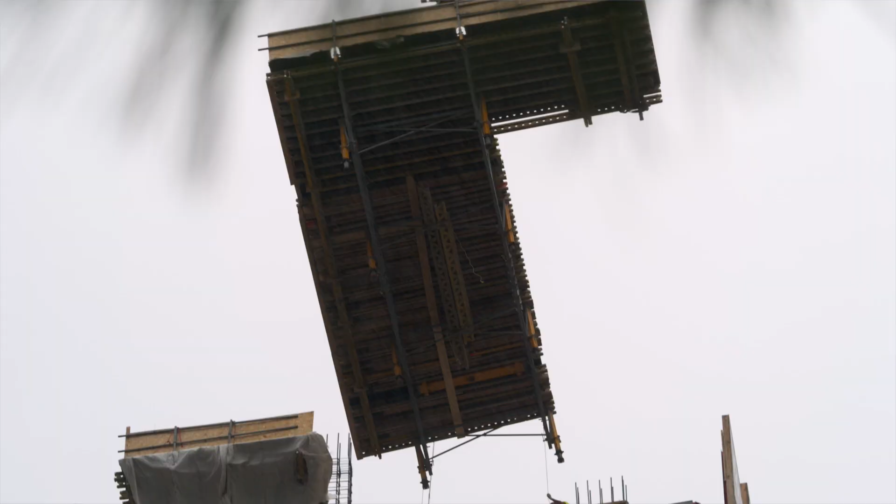The practice of moving fly forms from one level up to the next is high risk. There have unfortunately been multiple incidents. In some of those incidents, there have been fatalities. Simply put, when things go wrong with fly tables, they can go very, very wrong.

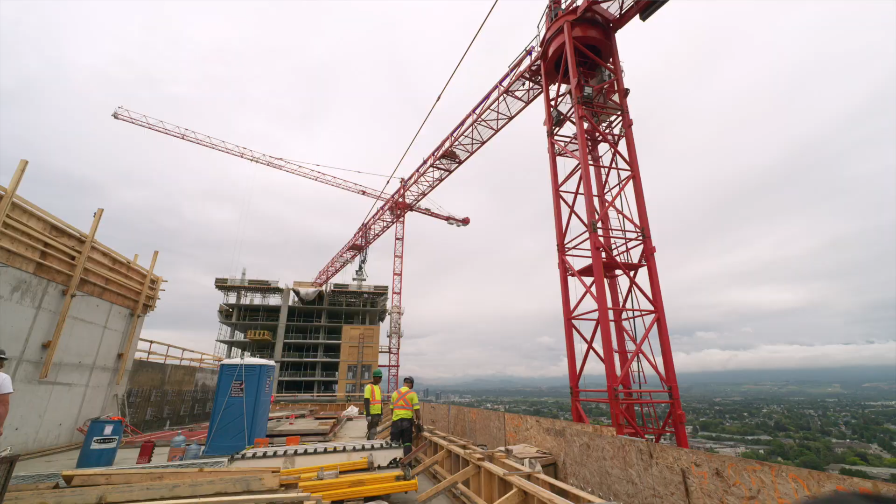Fly tables is one of the higher hazard procedures that we do on site. A lot goes into it in terms of the procedure and controls to prevent those hazards. Any crane activity comes with inherent hazards, but cycling fly tables, there's more moving parts and there's more coordination required, which just ups the ante for something to go wrong.

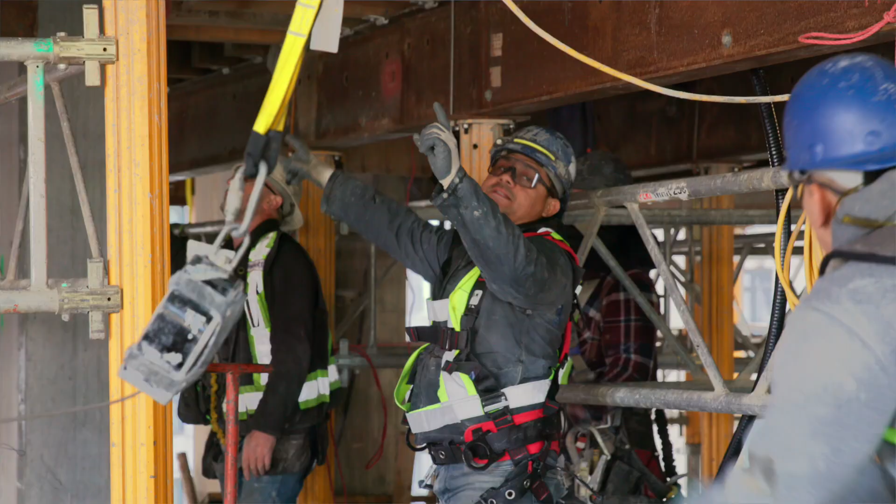We're up high, we're on the edge, we're building these buildings. It's all heavy-duty construction, so there's a lot of working pieces, a lot of moving parts. Everyone has to be on point, focused, and paying attention to their task at hand.

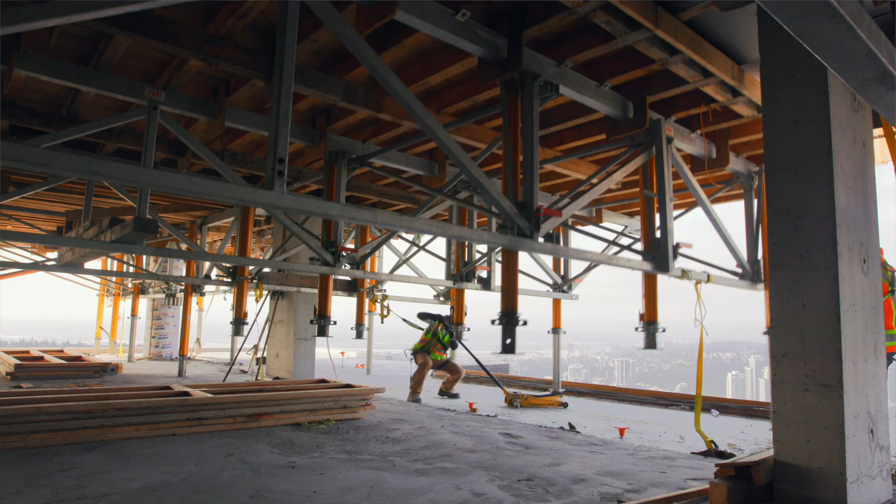These are large, complex operations, and people are at very high risk of getting hurt. As a result, WorkSafe BC is trying to do everything we can to put everybody involved in a position to do this work safely.

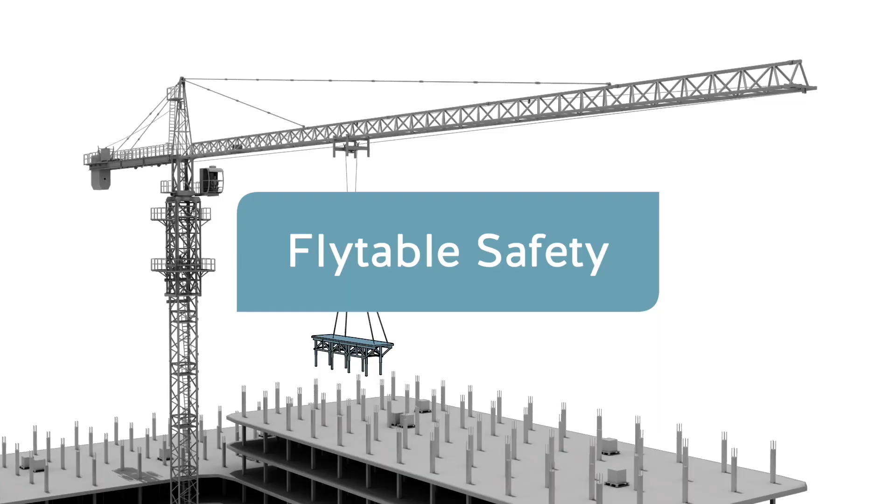The fly table process can kind of be broken down into 4 phases. The first phase is the dropping phase. In this phase, the table is lowered from the hardened slab. The next phase is the rolling phase. In this phase, there are wheels or casters that are attached to the fly table, and then it is moved partially out the side of the building, far enough that the crane can completely attach to the table itself.

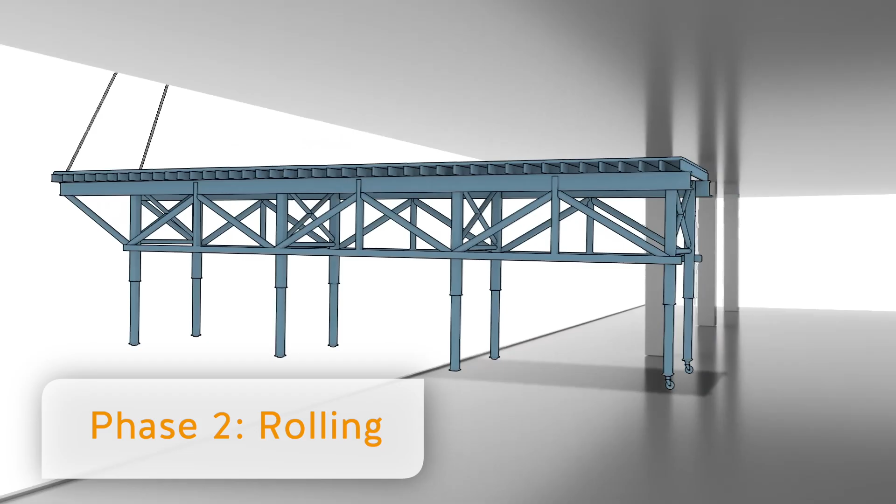Phase 3 is the lifting or the flying phase, where the crane picks the table up, takes it out the side of the building, and then flies it up to the next level. And then the 4th phase is the landing of the table, and it is secured to the point where it can be disconnected from the crane.

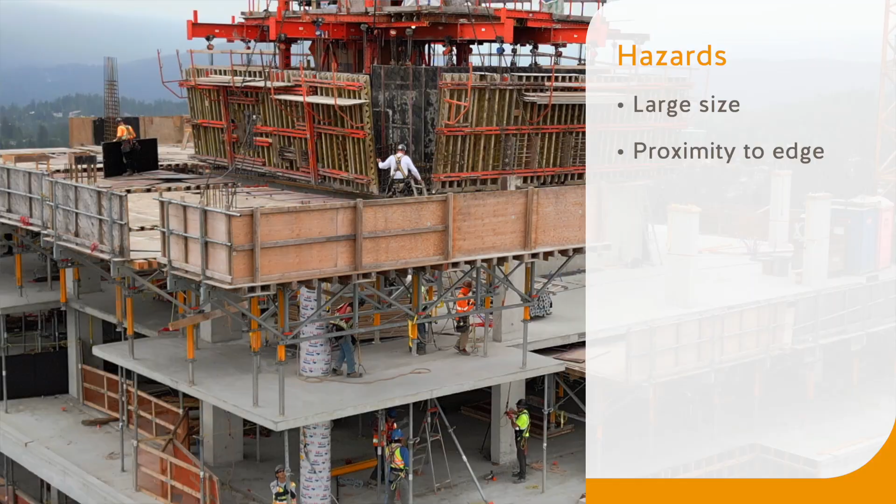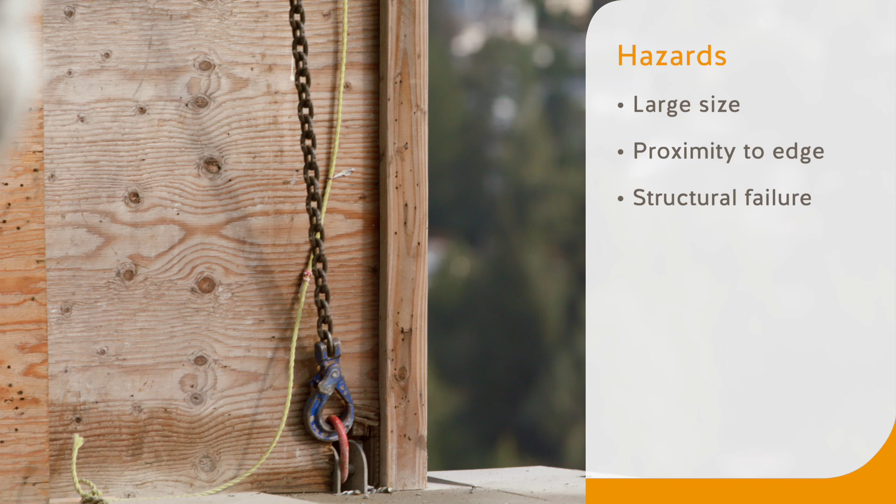Fly tables are large, heavy, so the hazards associated with them are simply their size and their position, also the proximity that they are to the edge of the building, so they can come out of the building, fall, and strike a worker at that point. Another potential issue is structural failure. While the table is being cycled, if one of the components' strength is exceeded, then that component could fail and then the table could fall down onto a worker.

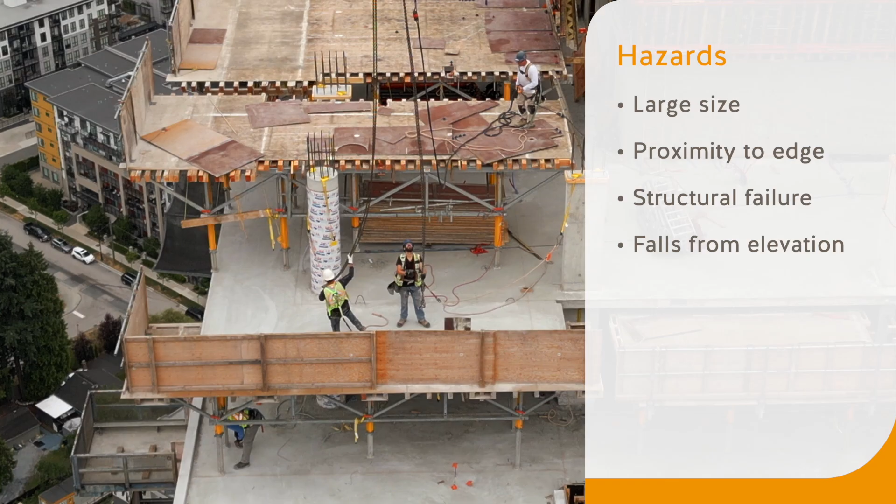Fly table work is done at height, so falls from elevation are another hazard that has to be effectively controlled. Everyone must have fall protection training, wear full fall arrest systems when they are near the edge. It's a long list of things to worry about when you're flying tables.

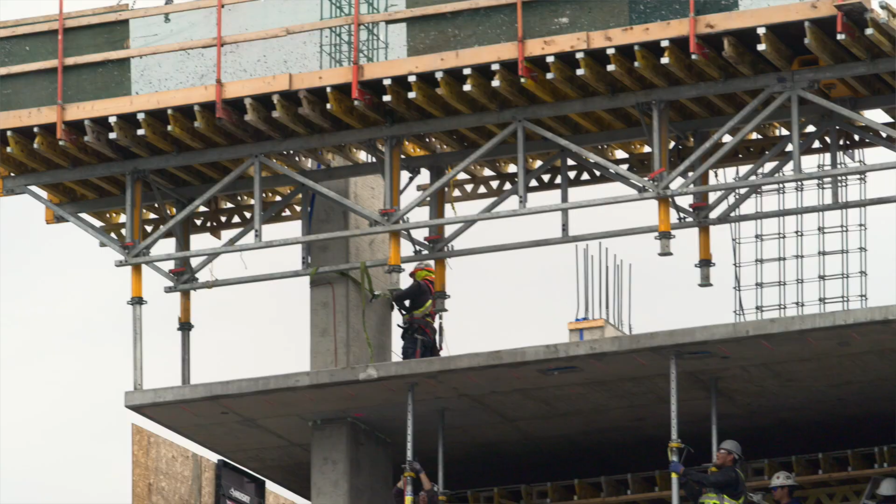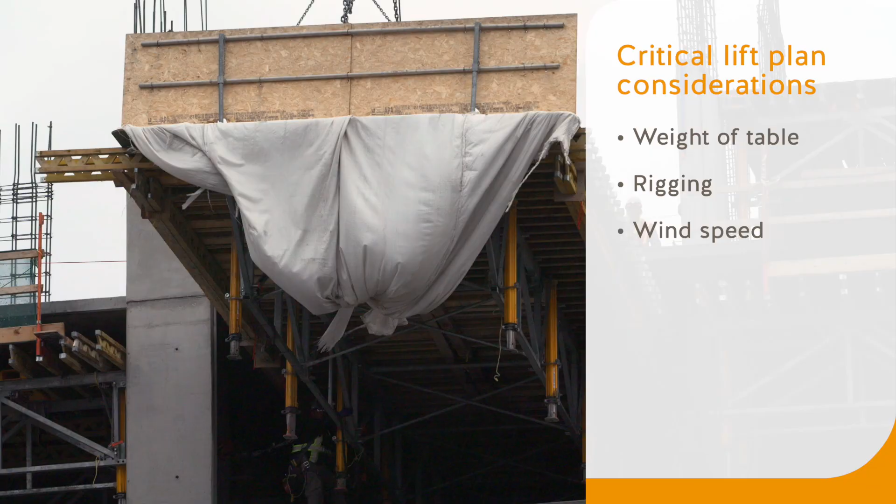The cycling of fly tables meets the definition of a critical lift. So to ensure that that higher risk is adequately controlled, there are these additional requirements. The contractor needs to develop a critical lift plan, which has consideration of the weight that's being lifted, the rigging that's going to be used, wind speed. Windy days, you're not able to fly the tables. Potentially you have the fillers and other material on top of the table that could fly off and come down.

The other requirement is to have a pre-lift meeting before hoisting activities begin on that particular day. All the different lift plans will be reviewed in that meeting, and then the workers, they're clear on what needs to be done. They can go out and cycle the table safely.

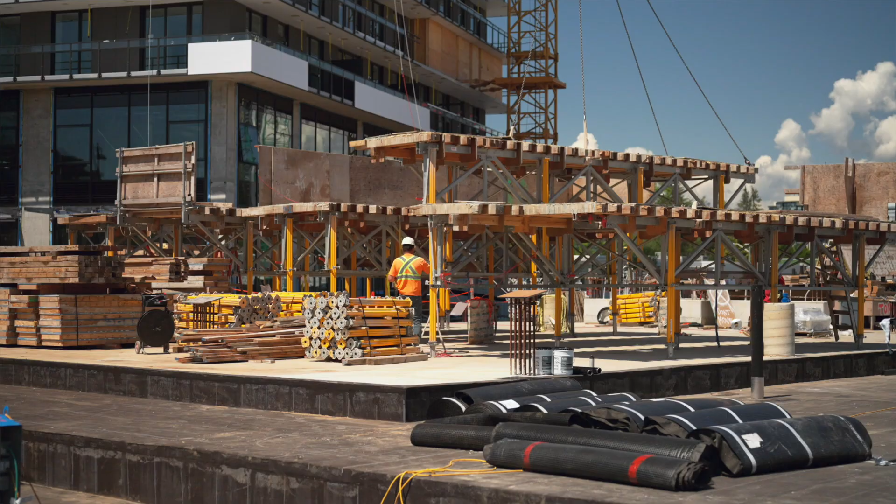The engineered drawings for fly tables are critical. It requires site-specific engineered drawings to be prepared. And so the formwork engineer goes through the process of designing all the individual tables so that the formwork trade can assemble those individual fly tables prior to them being moved up into the building. The drawings also go into details on the cycling process and the crucial steps that need to be followed when the tables are cycled from one level up to the next.

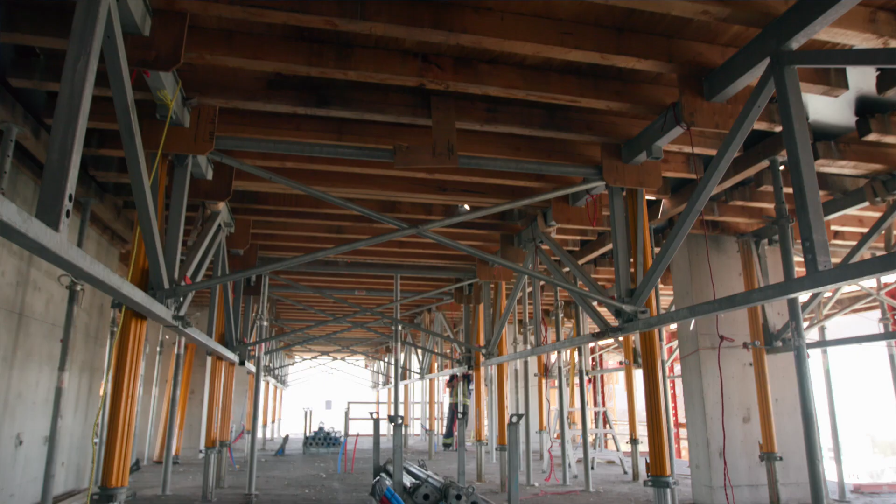Engineer drawings are probably the most important part of the table drawings. We build the tables to the exact specifications of the engineer drawings. Before we pour concrete, a certified engineer comes in and inspects the tables to make sure they are built the proper way as according to the drawings.

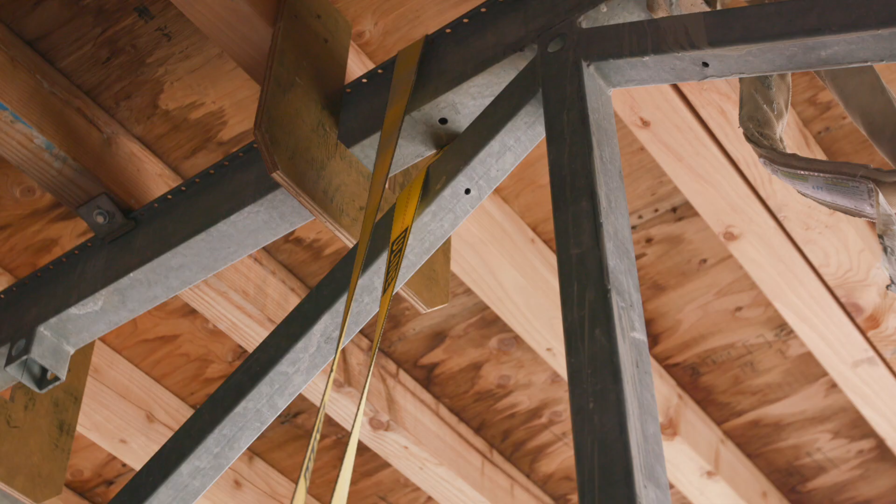Manufacturer's instructions tied in with the engineered drawings are critical because it's their product. They know what their formwork systems can withstand. So it's critical we follow manufacturer's instructions when initially assembling the table, but also in inspecting and maintaining the table so that we are always within manufacturer's specs.

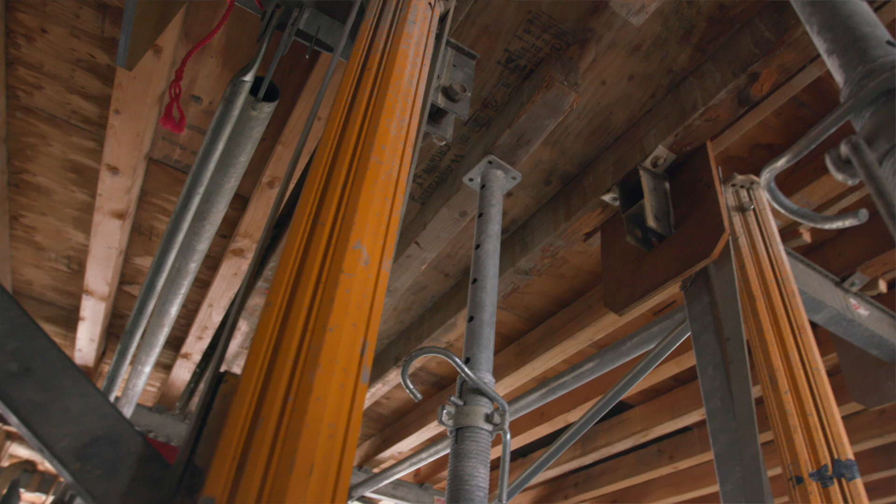The information from the engineered drawings and the manufacturer's instructions, the safe work procedures incorporate that information and then expand upon it and add the additional steps the workers need in order to do that work safely. Safe work procedures deal with the mundane and the extraordinary. That's a chance to identify the risks and how we're going to mitigate those risks.

Before we start our tower, we'll go through a toolbox talk between the whole crew and we'll go through the whole safe work procedure. By having them all together, is when you have the ability to find all the potential hazards and risks and being able to find ways to solve the problem.

Floor by floor, there's always small changes. So make sure that that's addressed with the workers first thing in the morning, so that even workers that are working 4 floors below know it's table day, know what's going to be happening, know what they need to watch out for. It's got to be done as a collaborative process to ensure the safety both for the workers performing the activities, looking after the prime contractors, and the public safety down below.

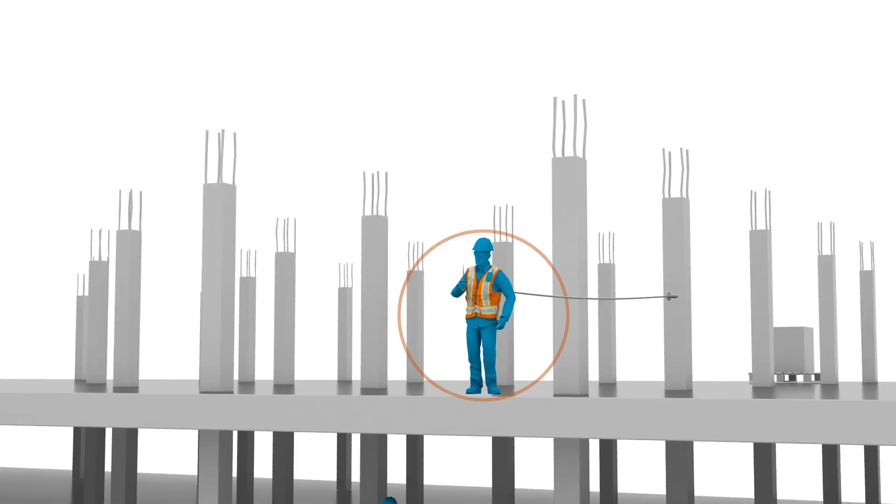On the communication side, you have workers that are on the level where the table starts. There are workers on the level where the table finishes. You have the crane operator. You have the spotters down at grade level or lower levels. They all have to be communicating and working together as a team. It's not just about telling people something or telling them what to do. It's confirming that they've understood and know what to do. That's critical to good communication.

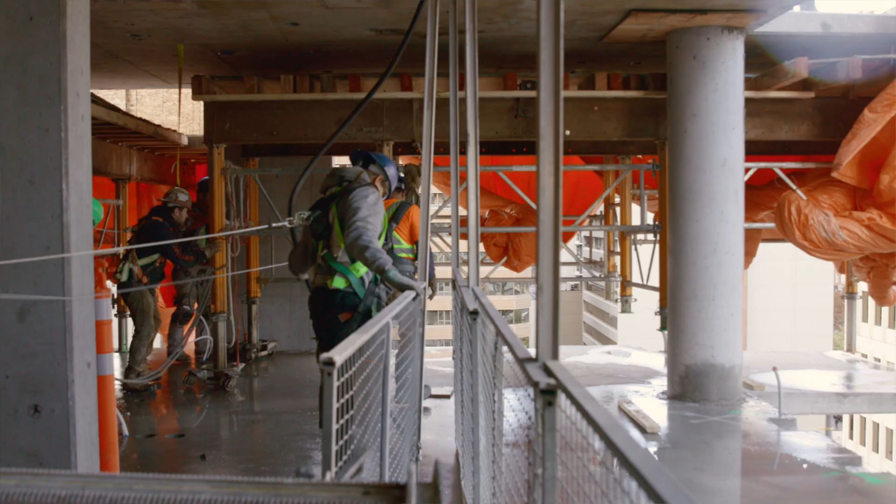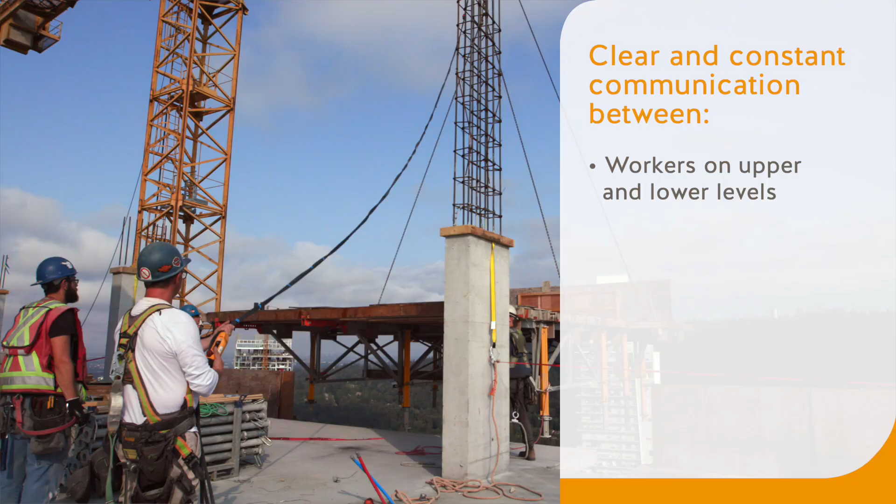As activities happen, the workers working in the same areas are very loud when they're talking because they're constantly communicating about every movement, every piece, every item, so the whole team is on the same page. Radio communication is critical between the crane, the riggers. The bottom rigger, for instance, will let the whole team behind him know what he's planning to do next. And it's the same with the top rigger as the table's coming in. Top rigger has to make sure that everyone knows what's going on and what her next move is.

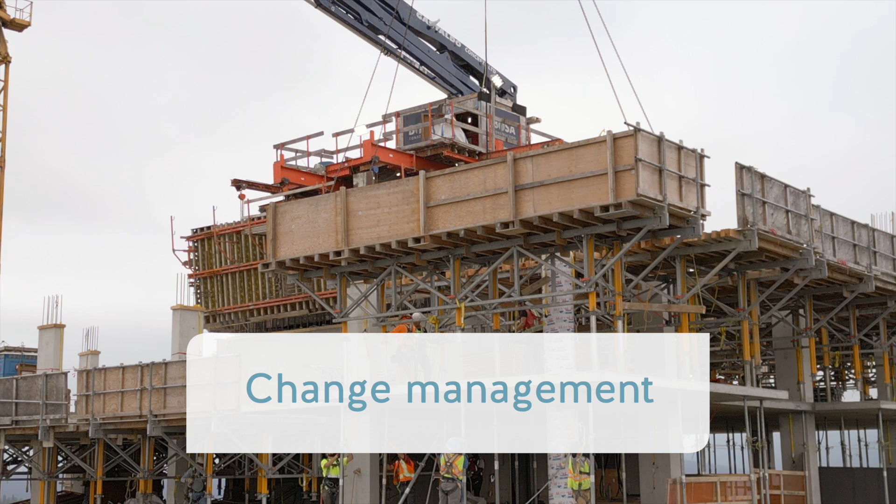The guys are working at heights. We're working with cranes. Multiple crew members are involved in the procedure itself, so communication is key. We often think when it comes to procedures and engineering drawings that this is how it's going to happen on the job site every day, all day. But that's not exactly true. Things happen every day that we have to adapt to conditions as they come about.

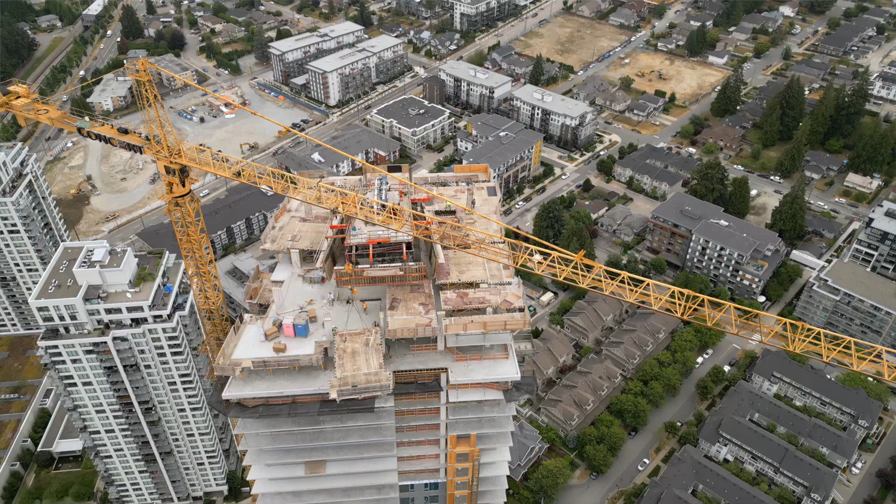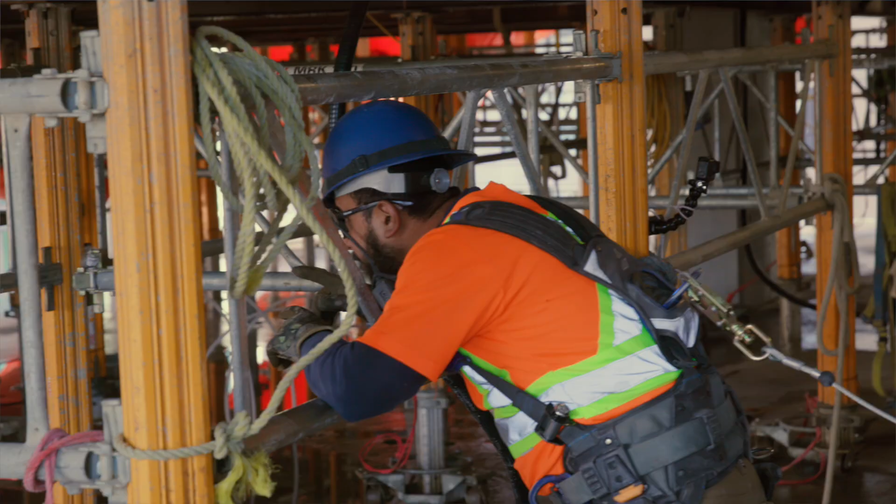A lot of times when we look at incidents involving fly forms, there was a change somewhere along the way, and that helped contribute to that incident occurring. So it's very important when unexpected conditions are encountered, everyone involved takes a step back and really walks through what all the potential consequences are of this change. The first step in change management is stop. Let's talk about it. Let's look at the drawings. Do we need new drawings?

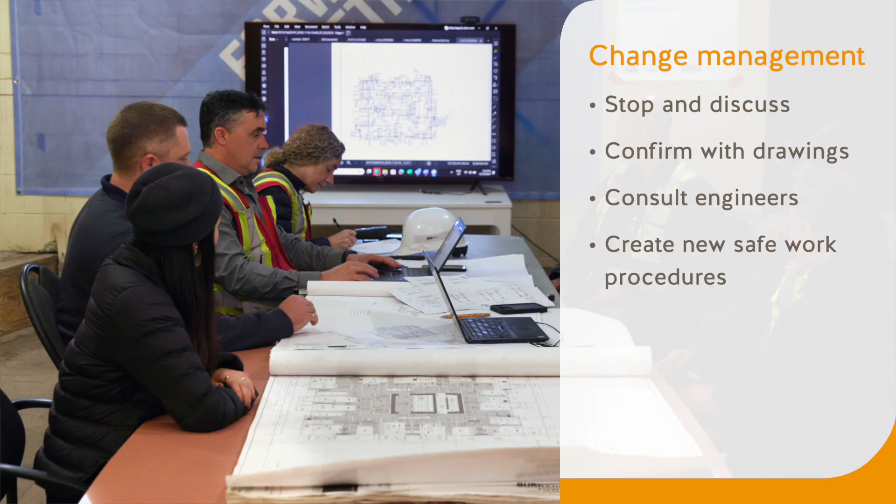When plans are changed, we do get the engineers involved, and then we will create safer procedures based on the engineer's recommendations. Everyone that's involved in that process needs to understand that a change is happening. They need to understand what the change is, and they need to understand what their role is in that change.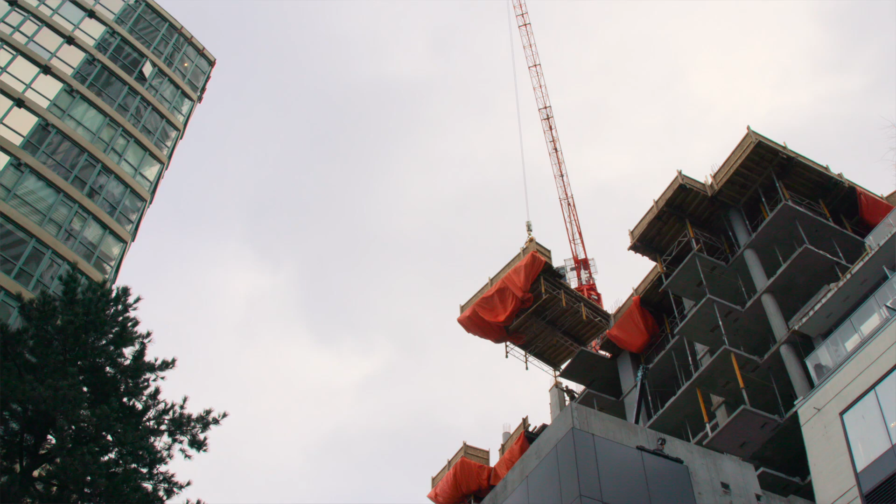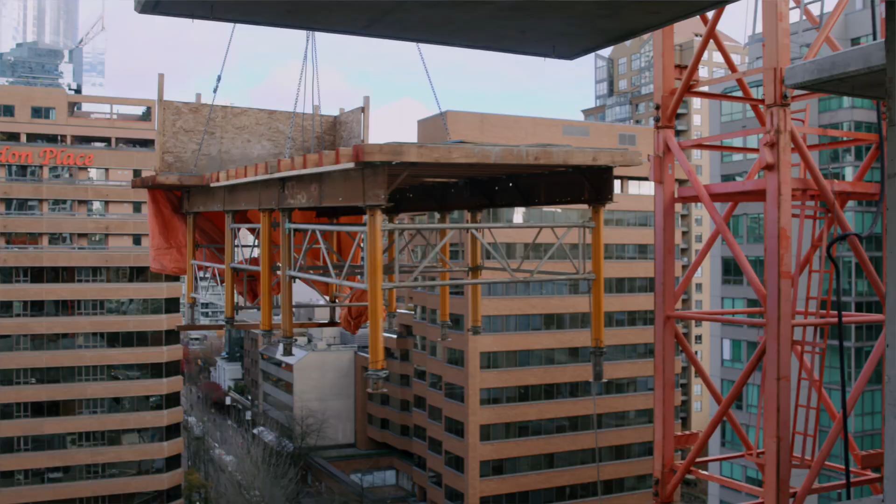The crane operator is ultimately responsible for the lift, and they coordinate the crane activities with the activities of the other members of the crew to make sure that things go smoothly. Just the nature in which the crane operator needs to slew the crane and move the trolley in order to keep the crane hook in the proper position, those are all challenging things to do.

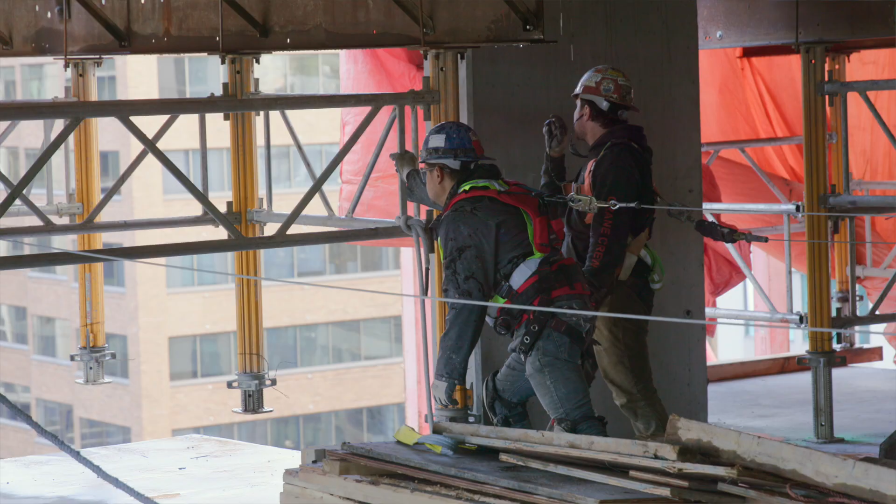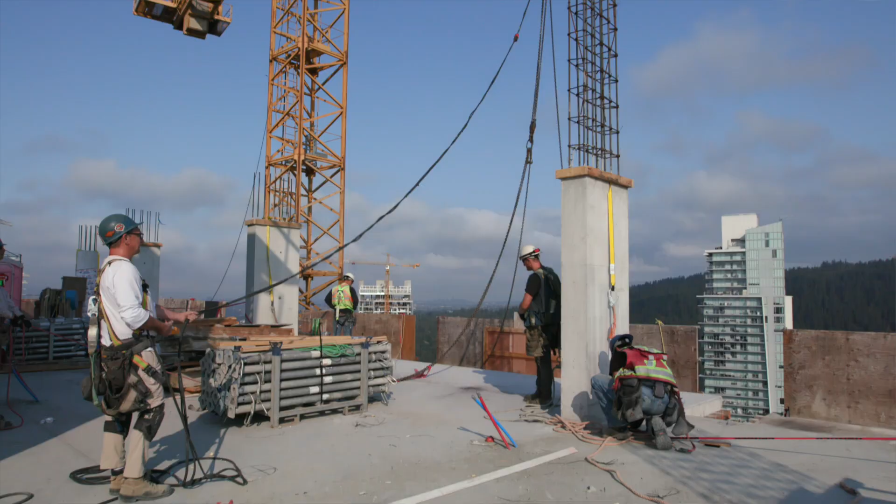The crane operator is really following the instruction from the riggers below. So they're kind of the middleman in all the communication to make sure all the operations go together of what's happening down below, what's happening up above on the slab, and then what actions are actually happening with the crane, as they're ultimately responsible for making corrections to how the hoisting is going and overseeing the overall operation of the lifting.

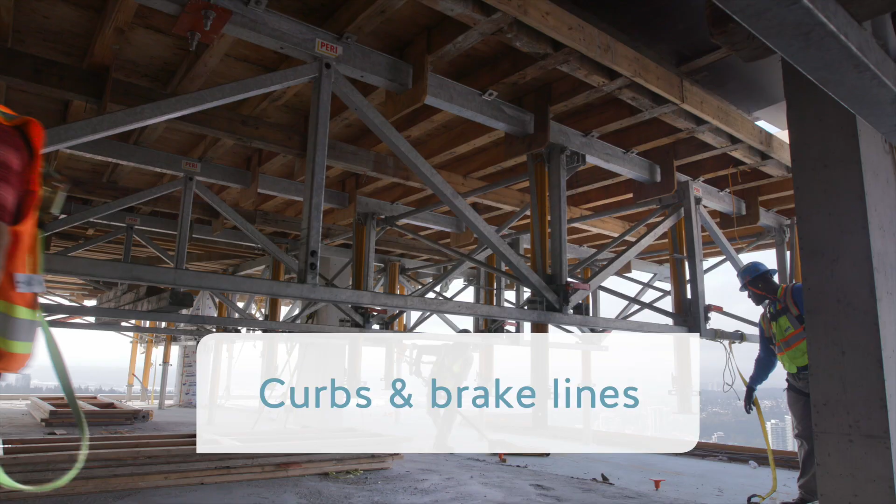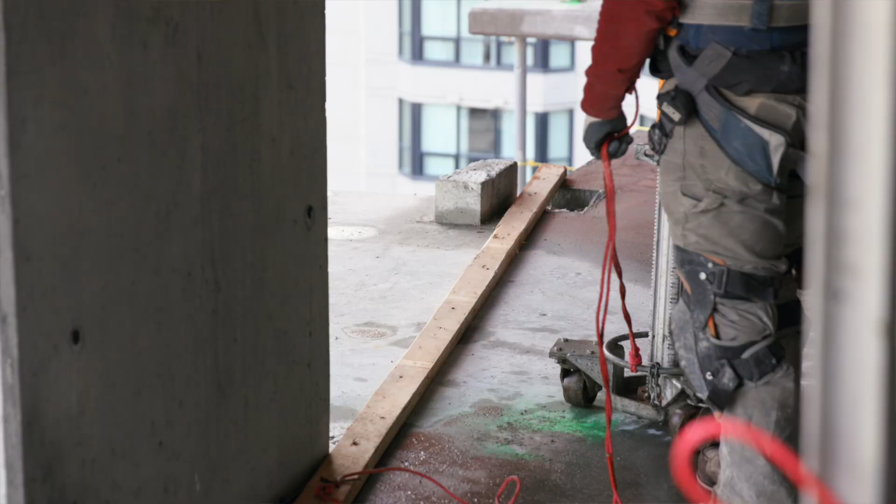In our safe work procedures, the safety measurement of when extra measures are needed on the edge of the slab is whenever the wheels are getting within 300 millimeters of the edge of that slab. So to minimize the risk, we use a kicker block or a curb at the edge of the slab. So in the event that the table is rolling out further than it should, it will hit the curb and stop it from coming off the slab.

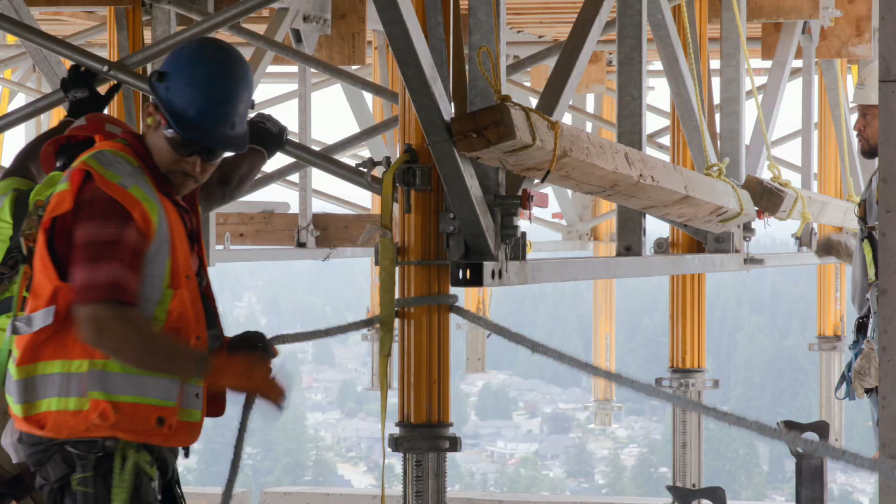We also use what we call a brake line. That's a rope that's tied to the back end of the table, anchored back to a column or a solid structure. And what that does is it controls the momentum of the table rolling out towards the edge so that you cannot build up too much momentum to the point where you can't stop the table. It's all about risk management basics, and it's putting effective controls in place to reduce the risk.

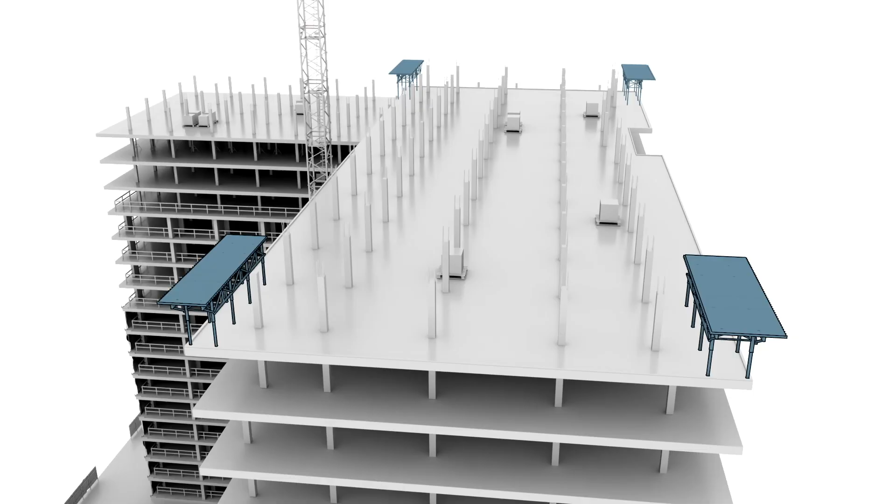The atypical or non-typical tables tend to be the ones that are close to the edges, and they're of unusual shape. They're often awkward to maneuver, so they need to have a plan for that lift, and they need to go over that plan and make sure everyone's aware right before the lift happens.

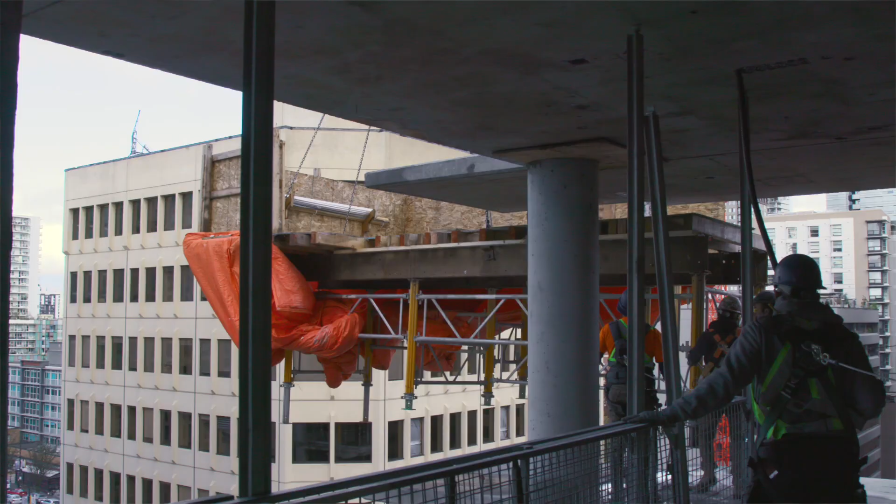The corner tables are a little bit unique just because they're not your typical fly in and out tables. They are sitting on the corner of the building. They're a lot skinnier. Typically, we tie those tables down right away with ratchet straps or coil rods before unhooking it from the crane, just because they are so skinny and so small, we don't want them to tip over.

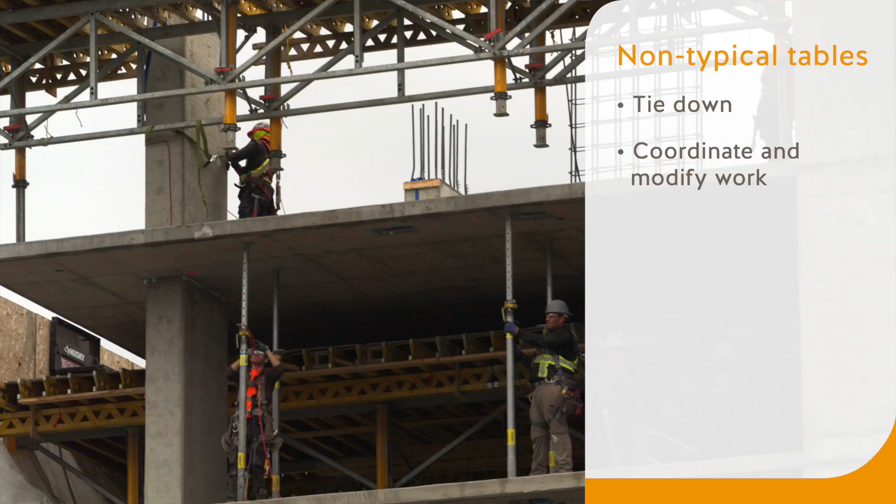When there's a table that's not typical and has to be flown out in a different way, we have to have a coordination meeting, because if a table is being manipulated in a certain way, maybe fall hazards are different, maybe inspections have to be done in a different way. That's up to a general contractor to communicate that to the site.

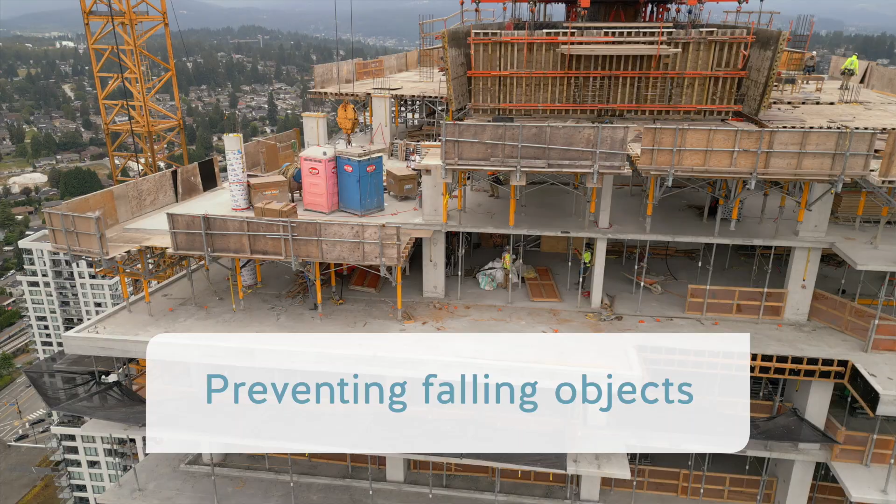For falling object prevention, the intent is nothing falls ever, and that's the goal. So we start by a couple simple principles. Never having materials anywhere near the edges that don't need to be there. Never having tools by the edges that don't need to be there. So you only have things that are needed for the work.

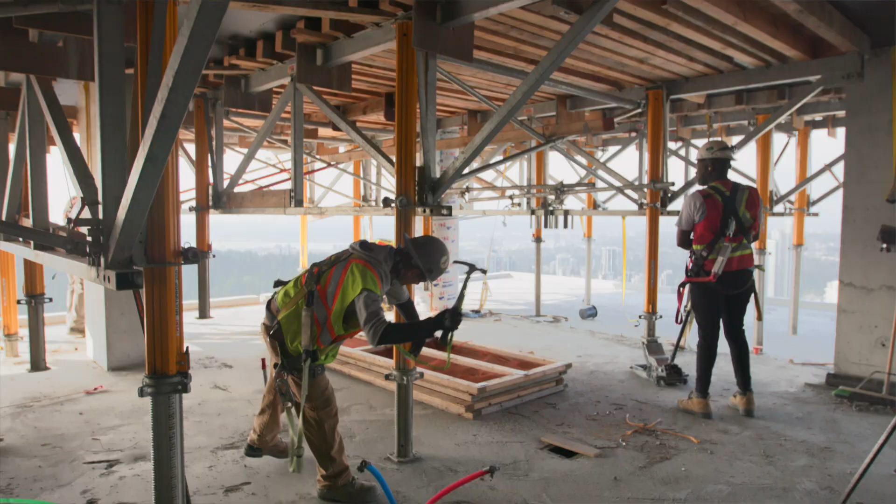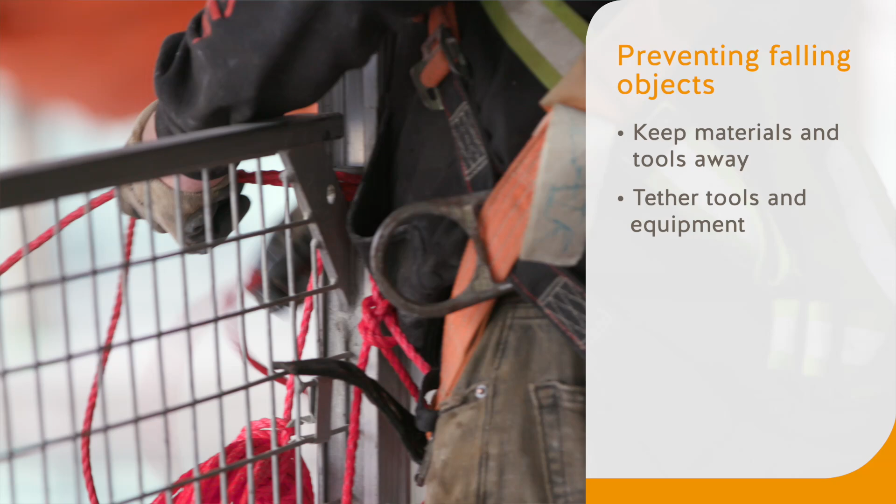Policy on site is that all workers working on the leading edge must tether all their tools and equipment to themselves or back to some sort of structure. And all equipment that's on the leading edge gets tethered back as well. You'll see on some projects there are actually screens at the leading edge that prevent any material or tools from coming off the side of the building.

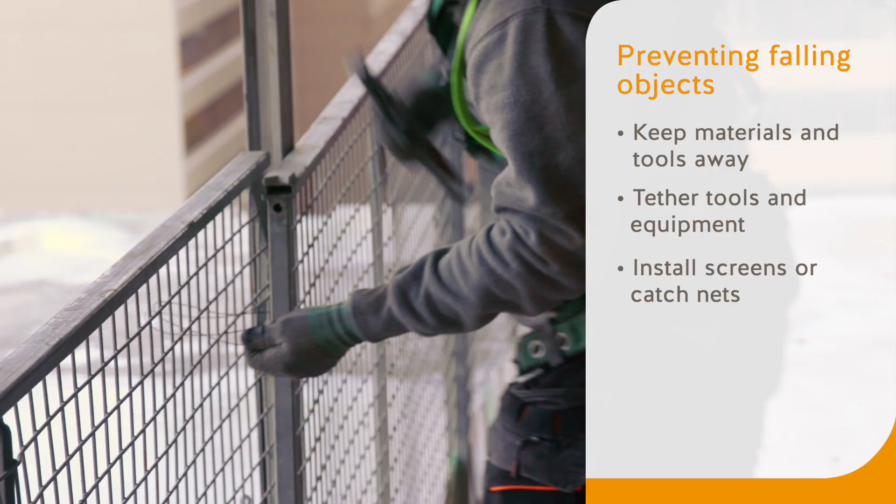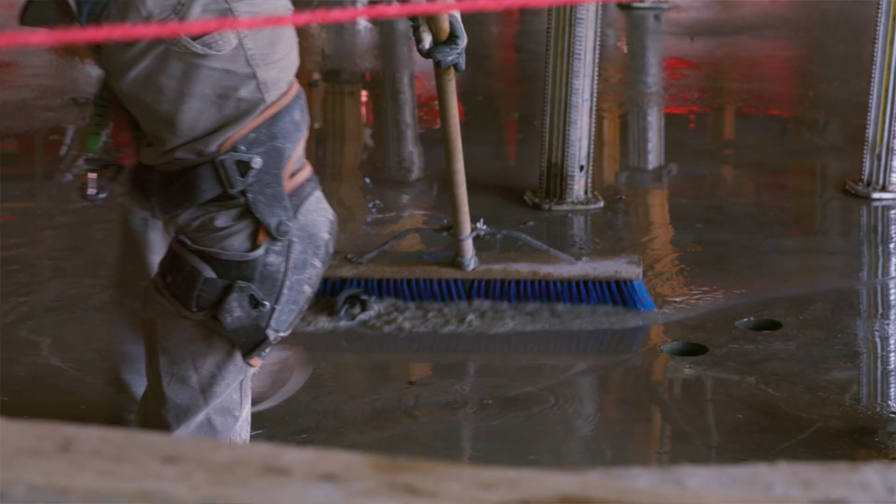And another control that can be implemented is catch nets that extend off the side of the building, so it's going to fall down 2 floors into that catch net as opposed to 37 floors down to the ground. We do clean up around the outside of the tables, any garbage, anything that may come down as we're dropping tables. We also tie all our fillers off with rope that are attached to the tables. If you can get good coordination with these things, you can eliminate a lot of the hazards.

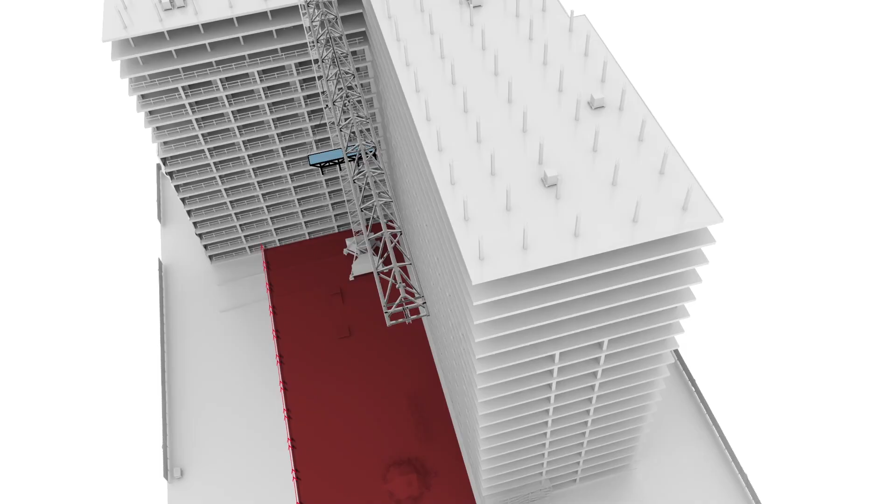There are parts of the regulation that talk about if something is being lifted above workers, that workers need to be kept out of that area where the object can drop. The exclusion zone is specifically an area where nobody can enter it. It is a last resort fail-safe, so that if something falls off the building, it falls in an area that's excluded from all personnel, public. In morning meetings, we discuss where they're located so that we can coordinate trades to work in other areas while those exclusion zones are set up.

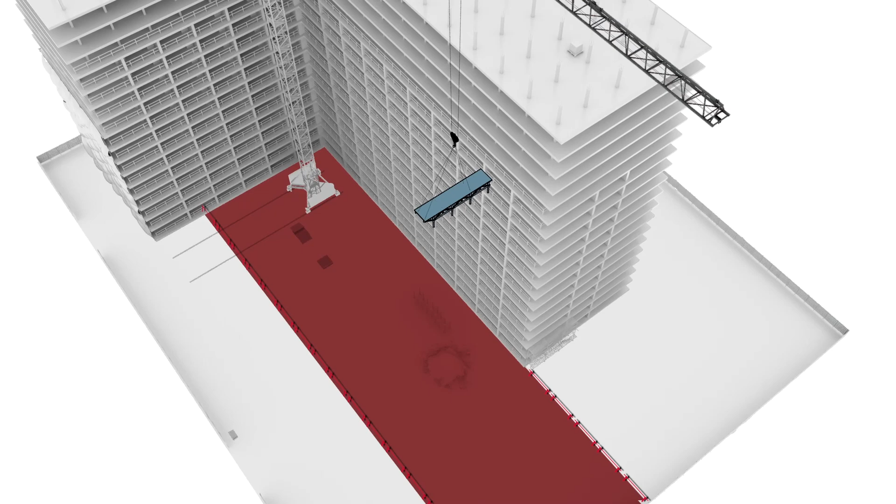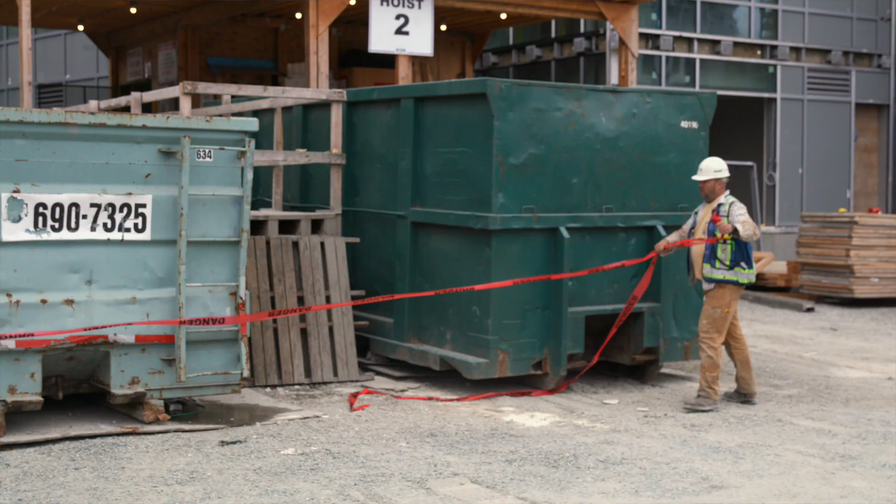So they really need to figure out how large that exclusion zone needs to be. But it also means that there needs to be people down at the bottom making sure workers don't enter that zone. So signage, delineation, spotters, training, supervision, all of those things are critical to make sure that nobody is in that exclusion zone. Exclusion zones move around potentially all 4 sides of the project, and it requires very diligent coordination so everyone knows the timing and the communication of when these zones are being taken down and put up on the different parts of the building.

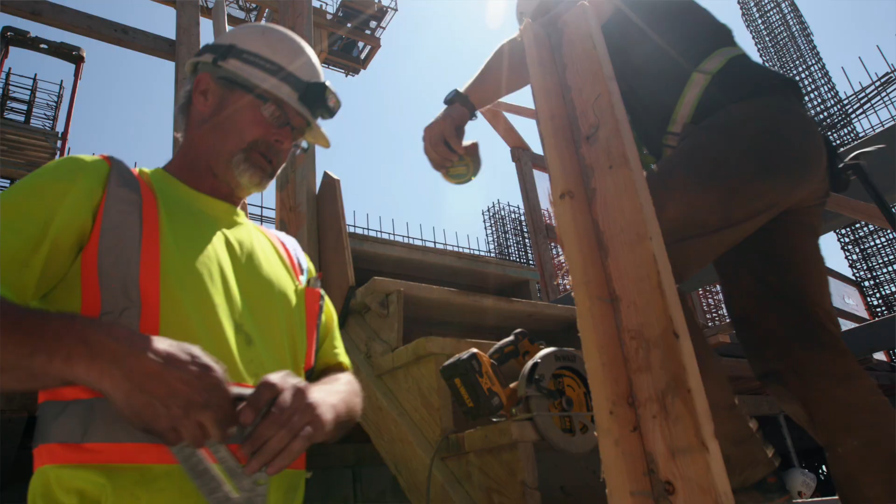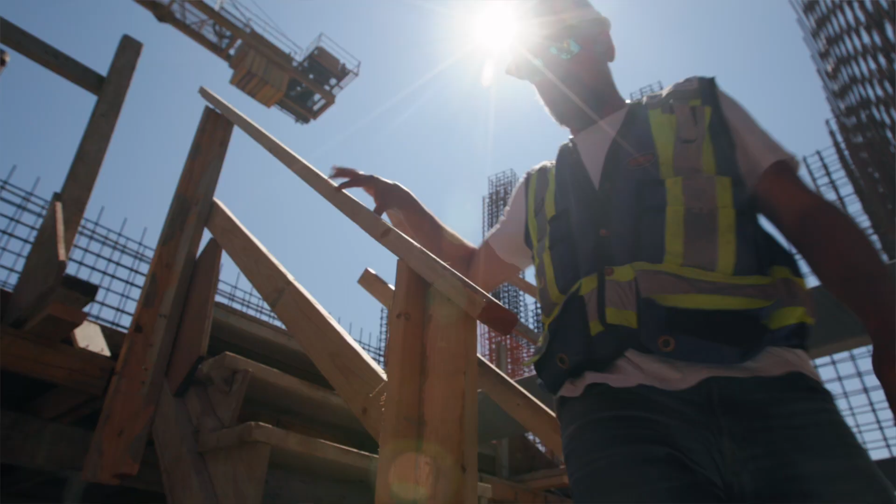Stair access to the next floor is part of our regulation, and it speaks to the ability to easily and safely access the next level when the work is happening. It is much less hazard hauling those items up a set of stairs than it is trying to take them up a ladder. Stairs need to be incorporated in the design. They need to know where they're going to put the stairs, the space for the stairs, and sometimes even have them engineered to be on the side of the fly table when they're flying them from level to level. So it's important to know in the design stage where they're going to put the stairs.

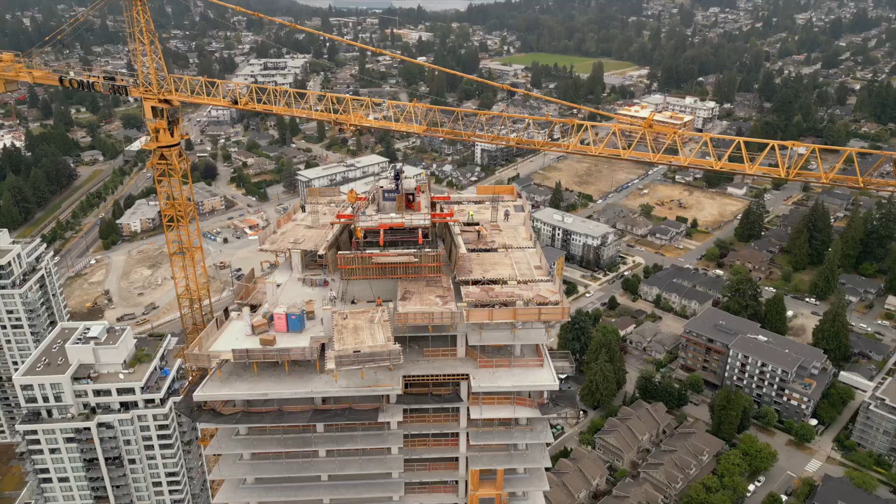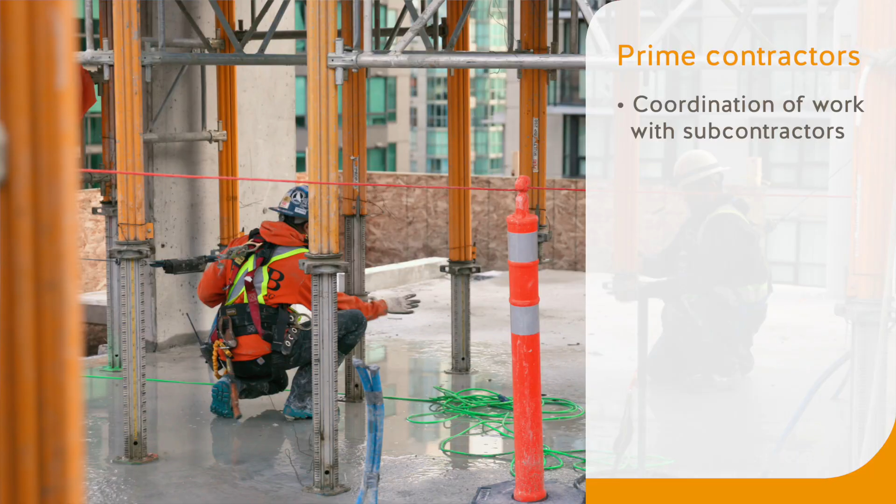Two main functions of the prime contractor, of course, are to ensure that coordination happens, that everyone knows what they need to do and when they're going to do it. The other main function of a prime contractor is to establish and maintain a system that will ensure compliance.

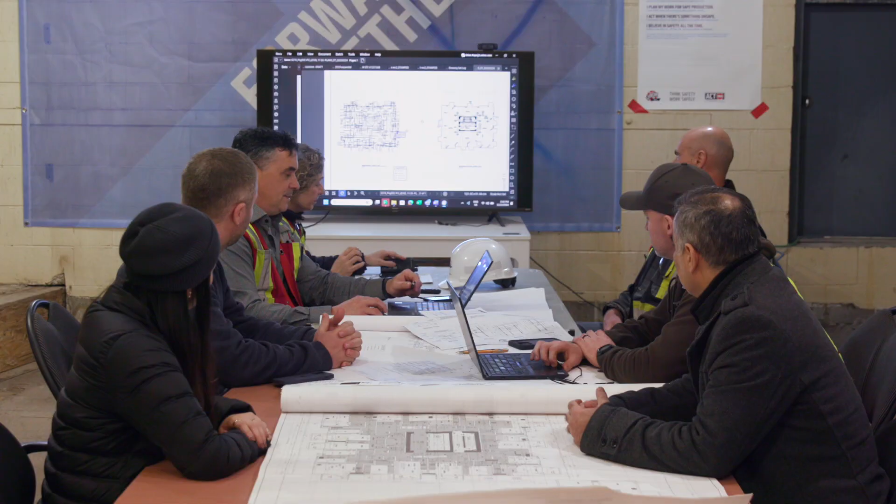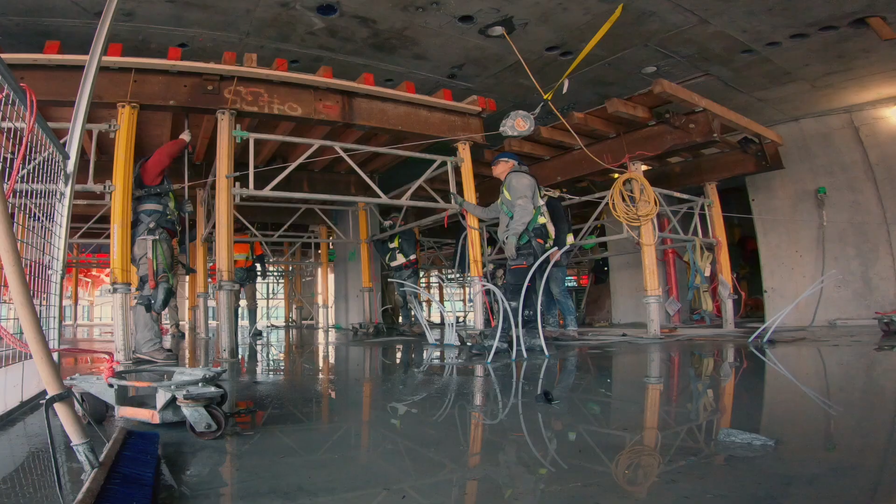So as the general contractor, we're not just passive and hand it off to the subcontractor and trust that they're doing the job correctly. We ensure that we're reviewing all the shop drawings, we're reviewing the job procedures, we're making sure the inspections are performed at the right times. We're ensuring that their quality control lists are signed off and the deck is safe for other trades to use.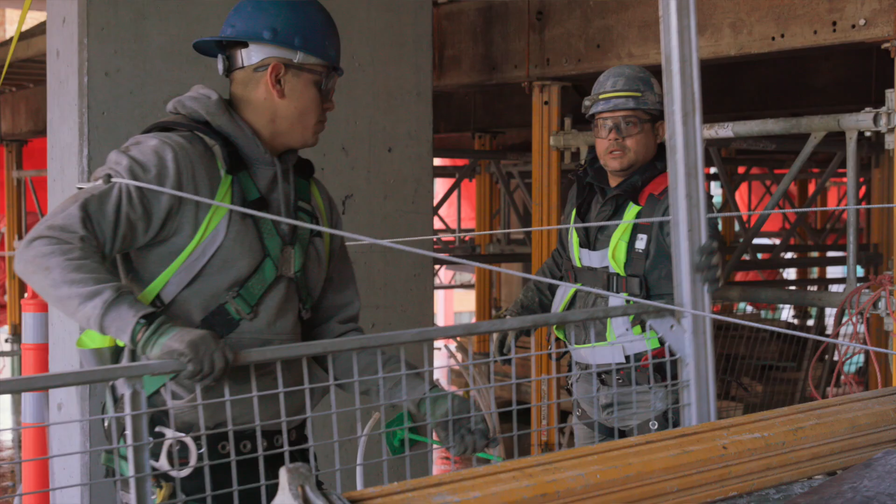We may not actually perform the work, but it's important for us to work with our contractors that are performing that activity so we can help them and work with them to develop hazard and risk mitigation strategies. So we can share that same knowledge with our other contractors that are in the vicinity.

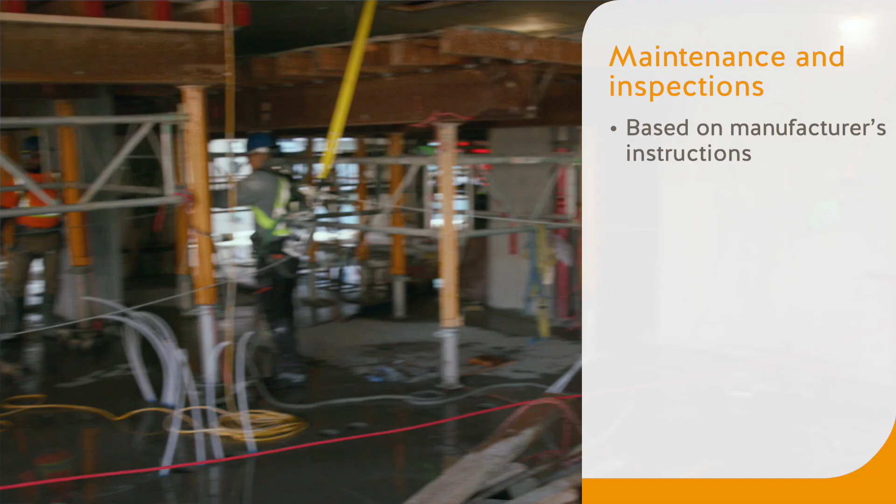Equipment and work processes need to be inspected regularly so that unsafe conditions don't arise. A lot of the equipment will have manufacturer's instructions, and the manufacturer's instructions lay out the maintenance schedule and the inspection schedule for these pieces of equipment. And if there isn't any, getting some advice from qualified people how often, what they should be looking at to absolutely ensure that those things are not going to fail while the work is happening.

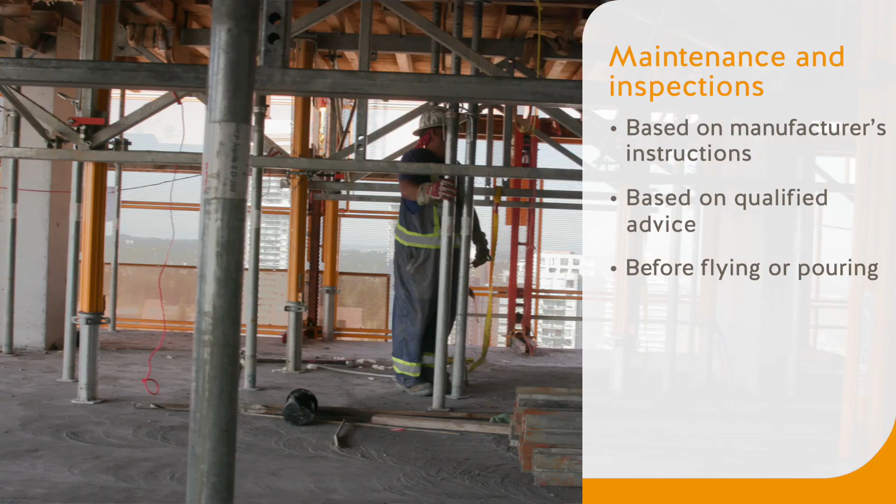So after every floor, after you finish your tables, we usually dedicate one guy underneath our tables to do a full inspection. We inspect the spindles, just make sure there's no cracks in our feet, make sure all our cotter pins are still in, because when you drop the table, sometimes they can pop out a bit, just to make sure that everything is still in good working order. Before we pour the concrete, we inspect the table again to make sure all the reshoring is in place, everything is up to capacity, and we are able to pour the concrete.

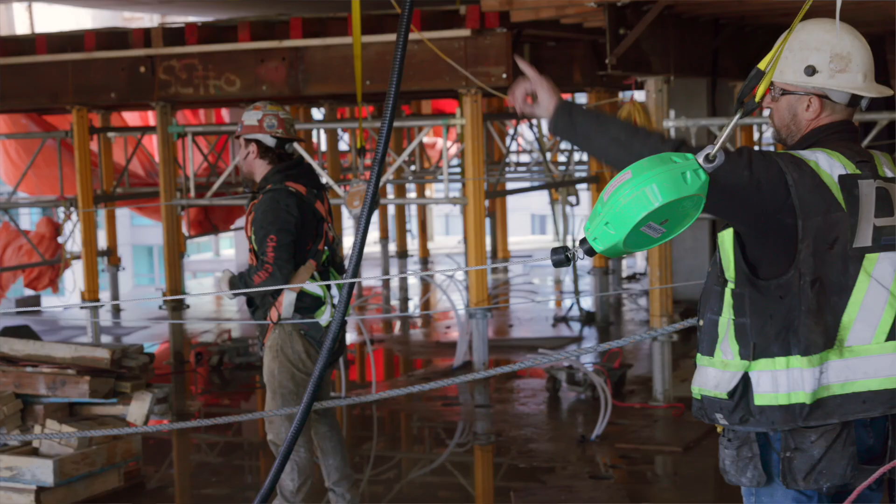The more eyes having a look at the work, the process is just going to make everything better and going to minimize the chance of anything ever going wrong. It's incumbent on the workers, the supervisors, the employers. Everybody has a role to play.

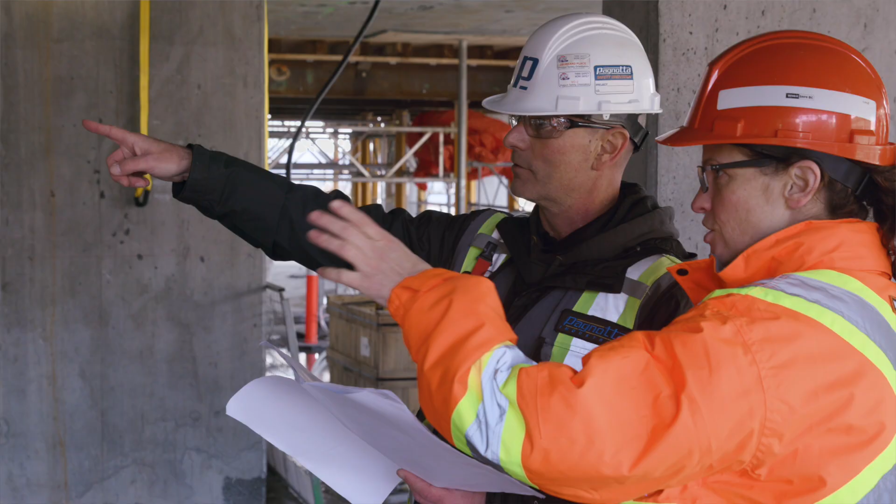The training that a worker requires is really dependent on what their role is. That said, the expectation would be that workers have sufficient training to enable them to do the job safely right from the get-go. And they are going to learn with experience to help make sure the lift can go safely. If you're new or you're from another employer, you're better off just standing back and watching what's happening. Give a hand where you can when you know you're safe, and eventually they're going to get in the routine.

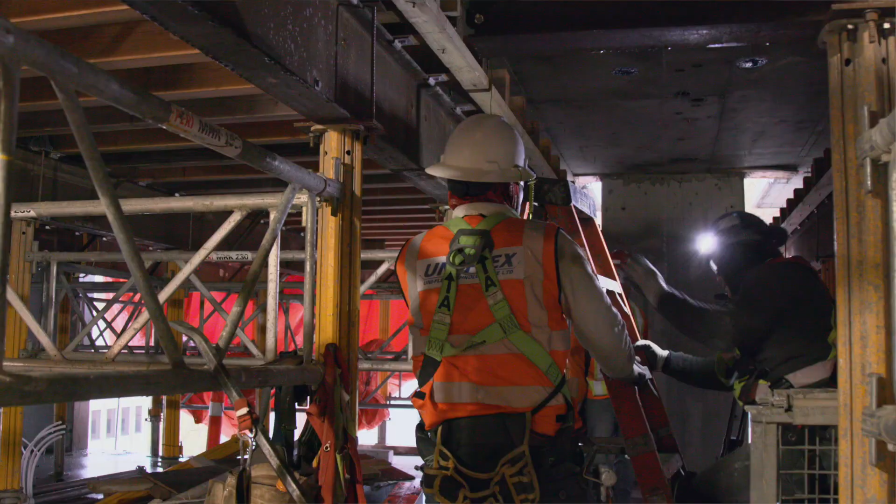The experienced workers, they have to teach, they have to coach, they have to talk to those younger, inexperienced workers. And in return, the younger, inexperienced workers have to feel strong enough, brave enough, safe enough to be able to ask those questions.

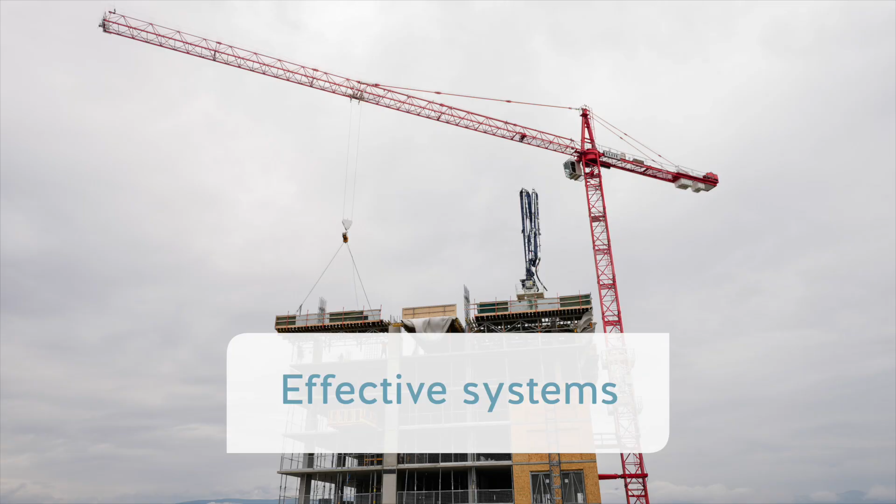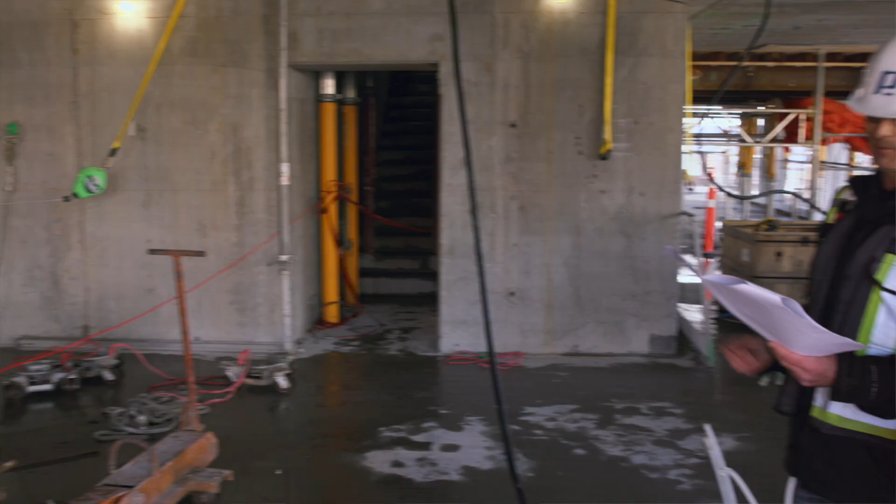When it comes to flyform safety, the one word that comes to mind for me is system. There needs to be an effective system in place to cycle the tables in order for that work to be done safely. Coordination of activities, clear communication, and well thought out procedures make it a success. I hope we continue to improve on our fly tables and get to zero incidents across all the industry. And young people feel safe to come into the industry and proceed with the work that we've been doing for so many years, finding ways to improve it.

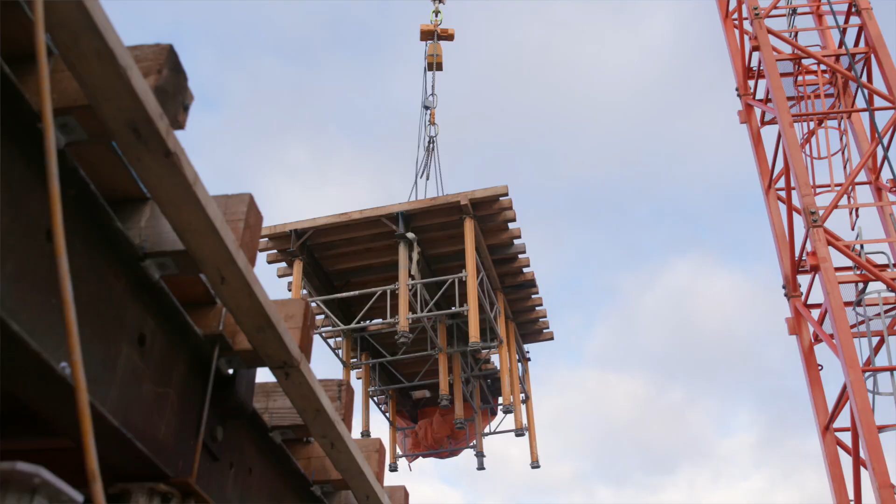It is so important for us to understand that fly table activities must be done flawlessly every time. So we have to work together with the engineers, the formwork contractors, the prime contractors, and the other workers involved to ensure that we understand when those changes happen and that we can come up with solutions to manage that change. It's how we approach health and safety. With the right controls in place and the right risk management in place, fly tables can be a controlled risk that is safe for workers to work around.